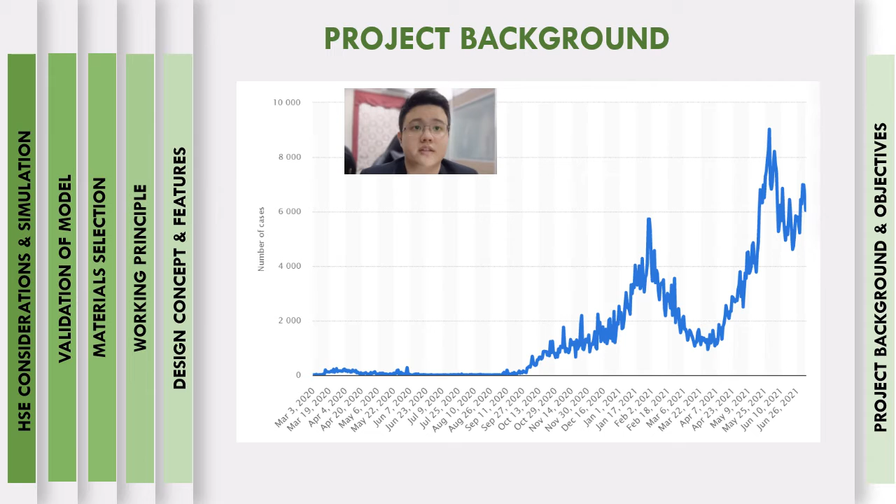The greater number of confirmed cases means that the usage of beds in quarantine centers will be higher, which we can always hear about. The capacity is full in a few of Malaysia's quarantine centers in these couple of weeks. According to a report from Channel News Asia (CNA), the quarantine center in Serdang should only be occupied by 60 patients in category 3, but on 16 May 2021, they already overloaded the beds to around 755 patients.

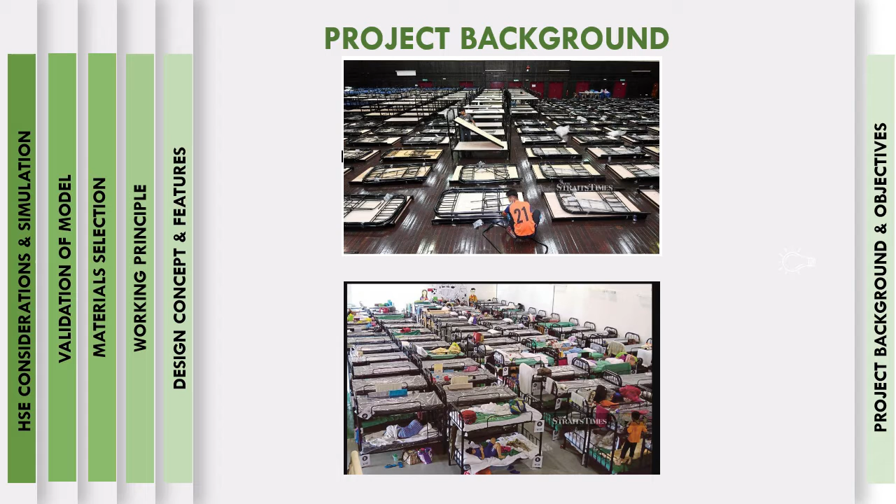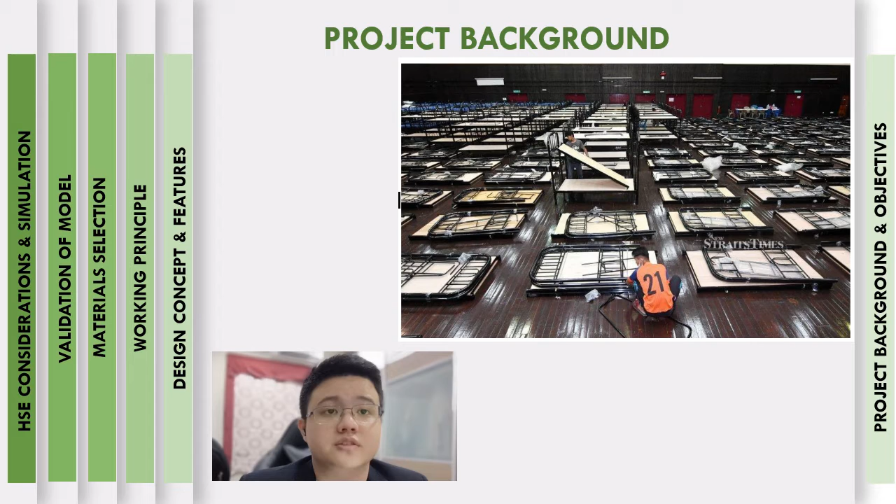This means the government needs to purchase more beds to handle the huge number of COVID-19 patients, so the government has already spent over a million ringgit buying beds for quarantine centers. However, here another problem has arisen: how the government should handle the beds after the pandemic. Are they going to discard them, which will lead to environmental issues, or will the beds be donated to the people in need?

With all these uncertainties, it inspired and motivated us to design a medical bed that can be used in both quarantine centers and hospitals, not only to avoid wastage but also to reduce the annual expenditure the government has spent to purchase healthcare facilities. And the bed we designed is called the Compact Self-Warming Bed, CSW Medical Bed.

The objective of our product is to design a durable, space-saving, portable, and cheaper CSW medical bed. Not only that, we also want to design a self-regulated warming CSW medical bed. Lastly, our objective is also to design a multi-purpose medical bed for use during emergencies.

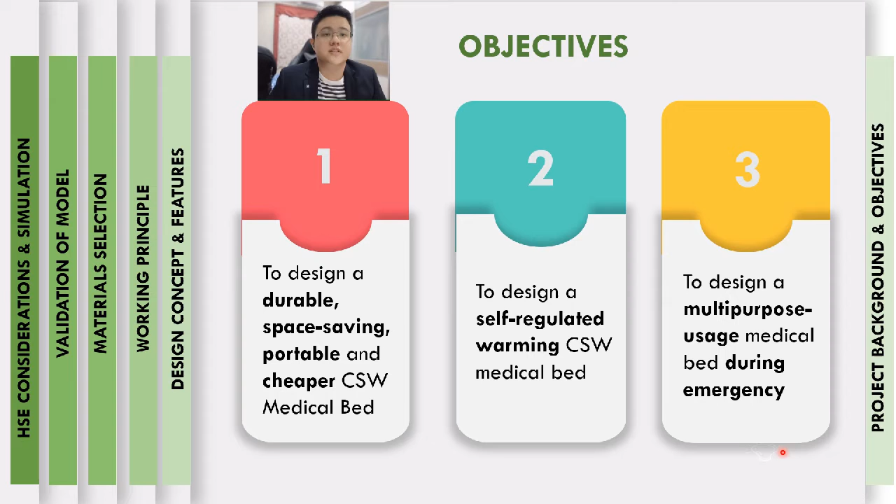Our product also fulfills the Sustainable Development Goals set by the United Nations, which we call SDGs. The first SDG our product achieves is SDG number 3, Good Health and Well-being, which will ensure healthy lives and promote well-being for everyone at all ages. The second SDG achieved is SDG number 11, Sustainable Cities and Communities, which makes cities and human settlements inclusive, safe, resilient, and sustainable.

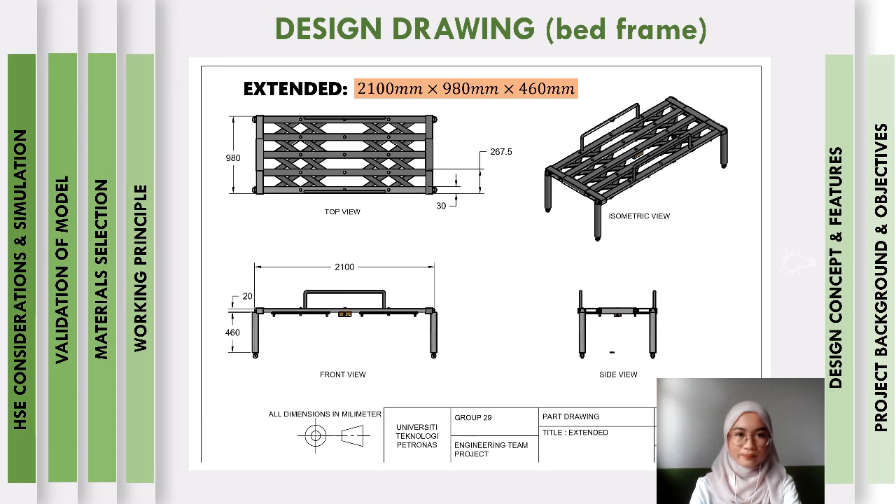The following shows the drawing of the bed frame in extended form. The dimensions for this form will be 2100 by 980 by 460 mm. This is the assembly drawing of our CSW medical bed, which will be explained further in the next video. This is a closer look at our CSW medical bed in extended form.

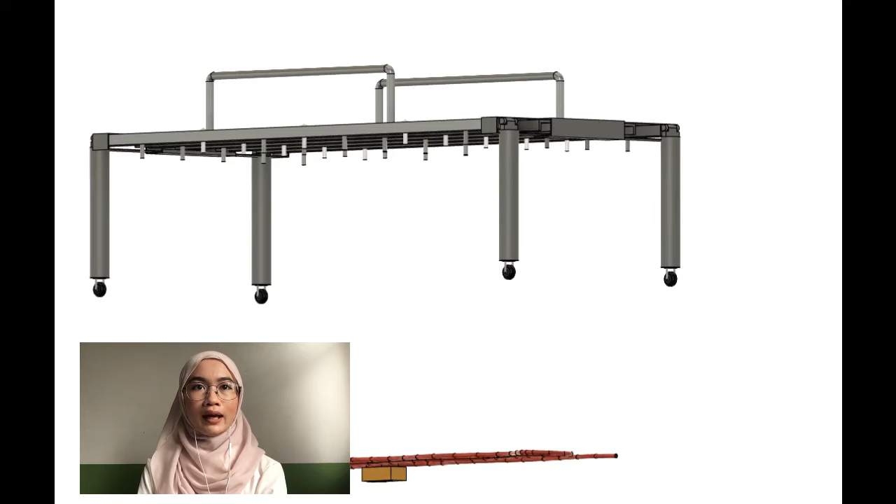At the bottom side of the bed frame, we have installed a self-heating system which is hidden along the hollows of the aluminum channels. Thus, it will not look messy with cables hanging around. Then, we place a mattress on top of the bed frame, which consists of 4 small mattresses combined. This CSW medical bed also has a rail guard to prevent patients from falling out of bed, foldable legs that can be rotated 90 degrees, and wheels for easy mobility.

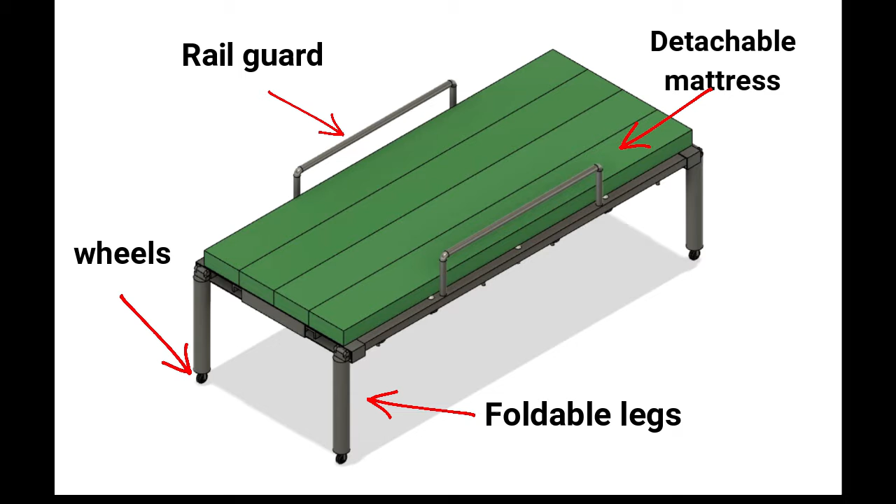After gathering the information, we have modified the existing medical bed into the CSW medical bed to solve the current issues mentioned in the problem background. For example, we have installed a fully automated heating system on our medical bed to solve the problem of high air conditioning in hospitals. When not in use, the CSW medical bed can be fully collapsed to a width of 200 mm.

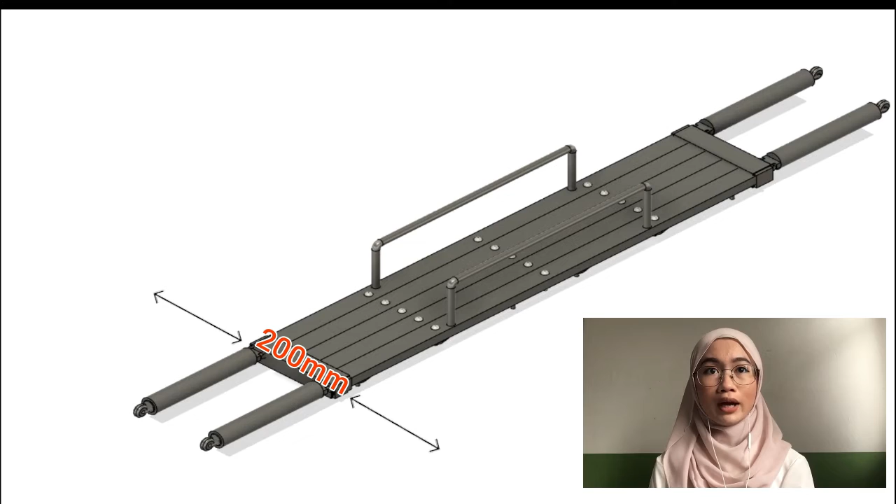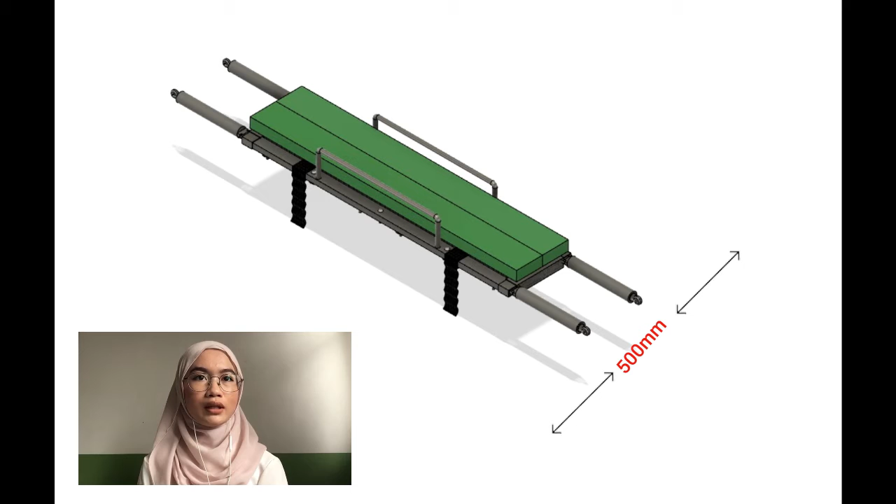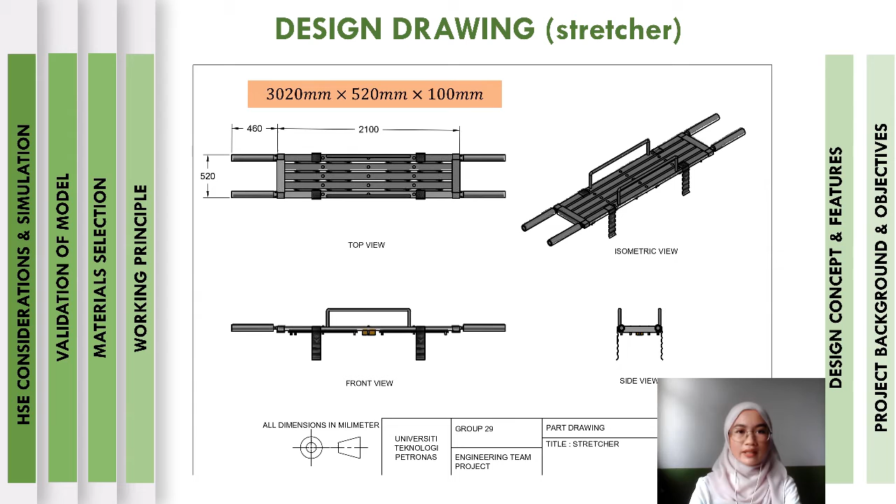Not only that, our CSW medical bed can be transformed into a stretcher. When it is in stretcher form, the bed will be collapsed to a width of 520 mm and 2 of the small mattresses will be put together. With this design, we have achieved Objective 3, which is to design a multi-purpose medical bed for use during emergencies. This is the detailed drawing and dimensions of the frame in stretcher form.

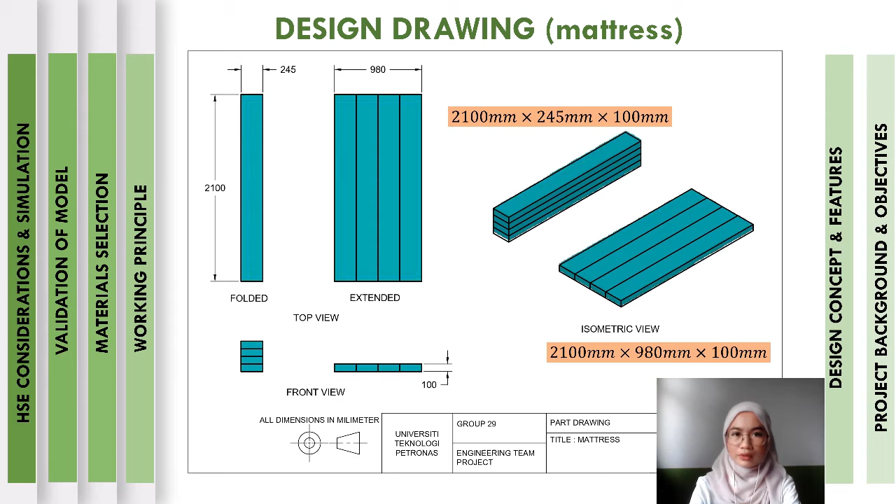Next, we have the drawing and dimensions of the frame in bunch form. Lastly, this is the drawing and dimensions of the mattress, which consists of 4 small mattresses combined together. Next, we will further discuss the working principle of the CSW medical bed in the next section.

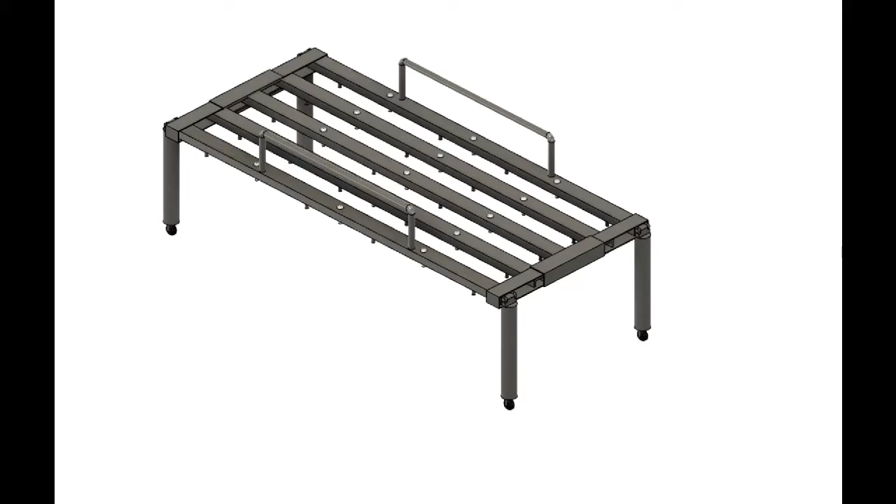The overall design concept and the working principle of our bed frame is greatly inspired by the working mechanism of the collapsible gate that is usually installed at shops. The bed frame is fabricated from vertical pieces of aluminum channel bar to provide the shape. Then, we use the double bar pantograph, a mechanical linkage connected in a manner based on parallelograms, which forms the X design to fill the gap between the vertical channels to reinforce the design. The double bar pantograph and the channels are held in place using fixed and movable rivets.

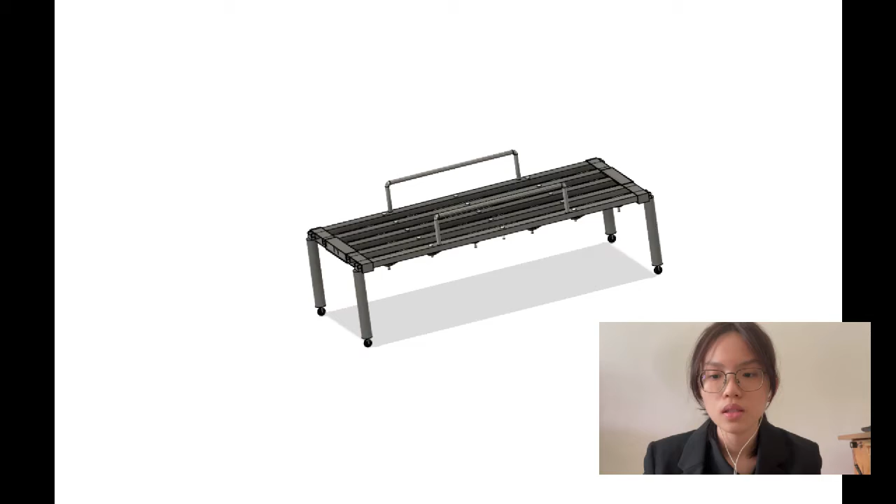With this kind of design, the bed frame can be freely closed or opened. The next video will show you how this can be done. This is a demonstration of the working mechanism between a set of channels. With a slight push, the bed frame is collapsed into a smaller size, and with a pull, it is extended. It can be closed partially to become a stretcher.

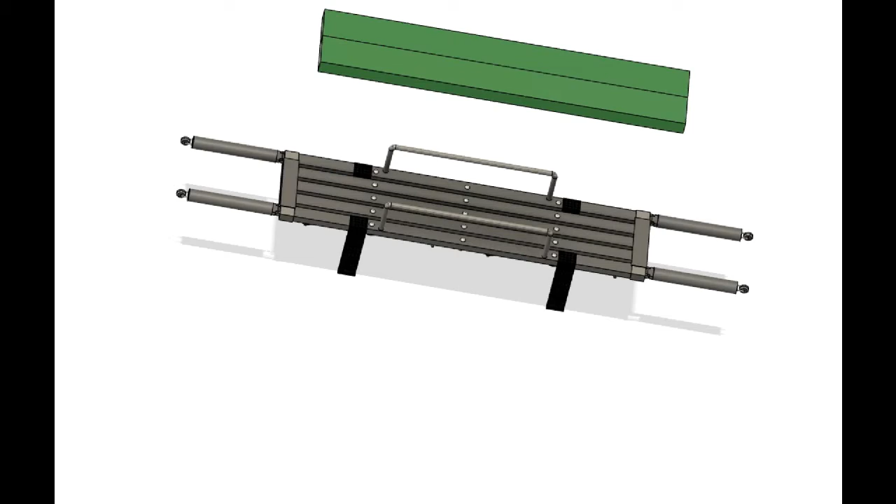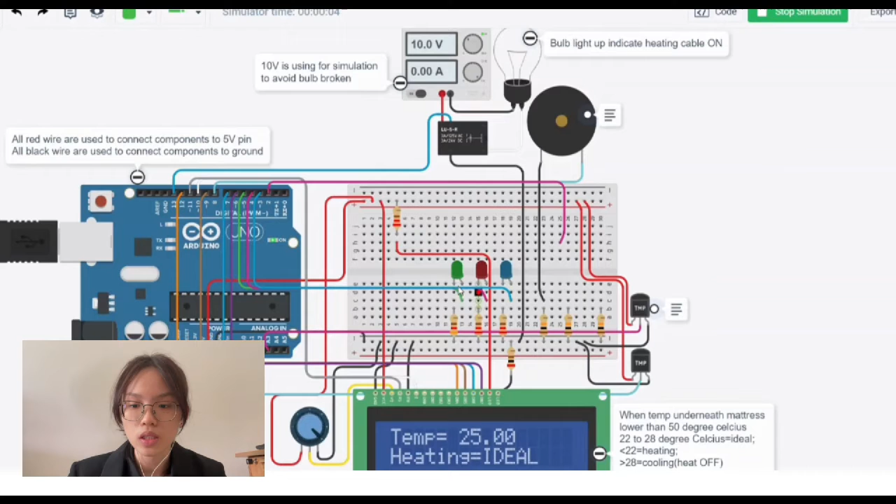This is the circuit simulation of the self-heating system. This is the code of program that runs in C++ language. Now, let's start the simulation. When the temperature is set at 25 degrees Celsius, the heating cable is off. When the temperature drops below 22 degrees Celsius, the relay closes the circuit and the current flows to generate heat.

The heating cable is on. Green LED is lit up as an indicator. When the temperature is adjusted to 38 degrees Celsius, it is beyond the ideal temperature. The relay opens the circuit and the current stops flowing. Red LED lights up. The heating cable is now off.

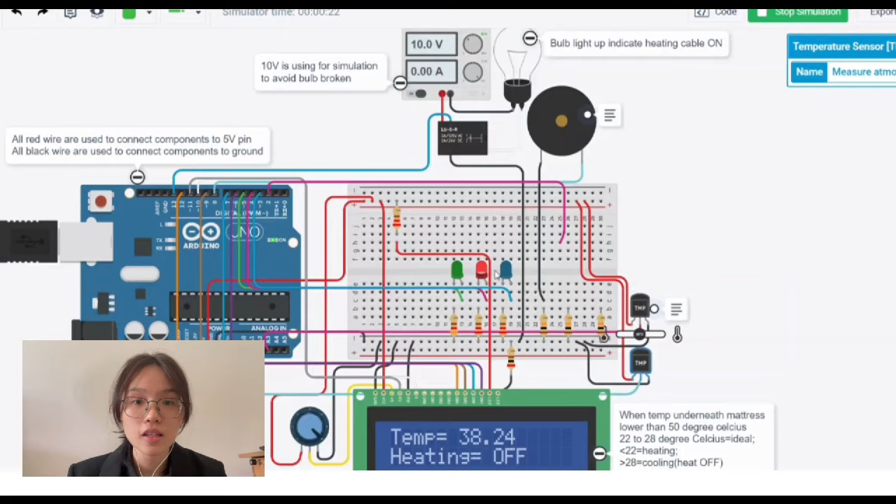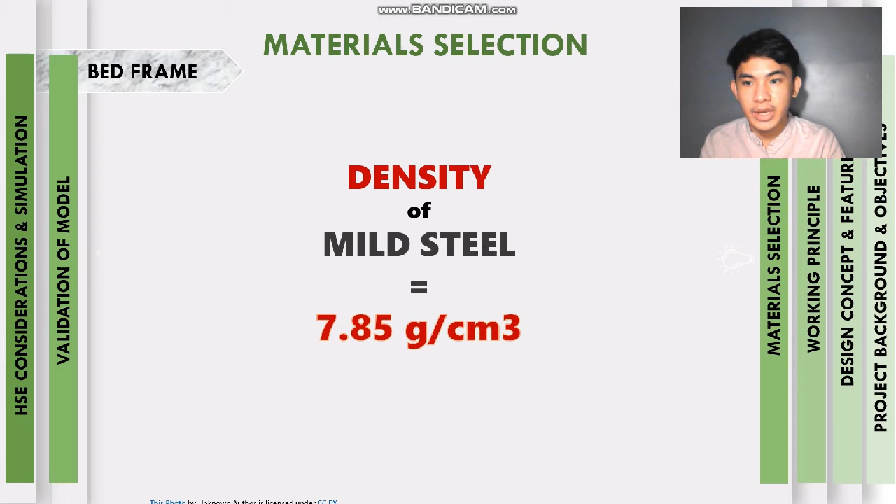For the material selection part, for the bed frame, the material that will be used is aluminum alloy 6061. This material application can be observed in various fields such as automobiles, aircrafts, marines, and defense. Aluminum alloy 6061 has a density of 2.7 gram per cubic centimeter, while mild steel has a density of 7.85 gram per cubic centimeter. This shows that aluminum alloy 6061 is lighter than mild steel. The weight factor is very important because people need to carry it when emergency happen.

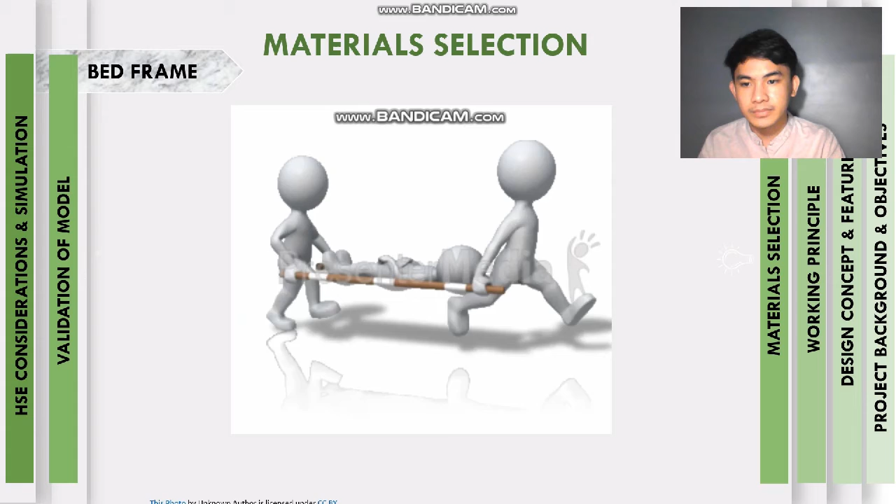Secondly, the heat conductivity of the material is also an aspect to consider, as the bed frame that will be produced is equipped with a heating system at the bed frame. Aluminum alloy 6061 has a thermal conductivity of 180 watt per meter Kelvin, while mild steel has a thermal conductivity of 51.9 watt per meter Kelvin. This proves that mild steel has a much lower conductivity than aluminum alloy 6061. If the material that will be used has lower thermal conductivity, then the efficiency of the heating system will be lower. Therefore, aluminum alloy 6061 is a suitable material for the bed frame, as it will increase the efficiency of the heating system.

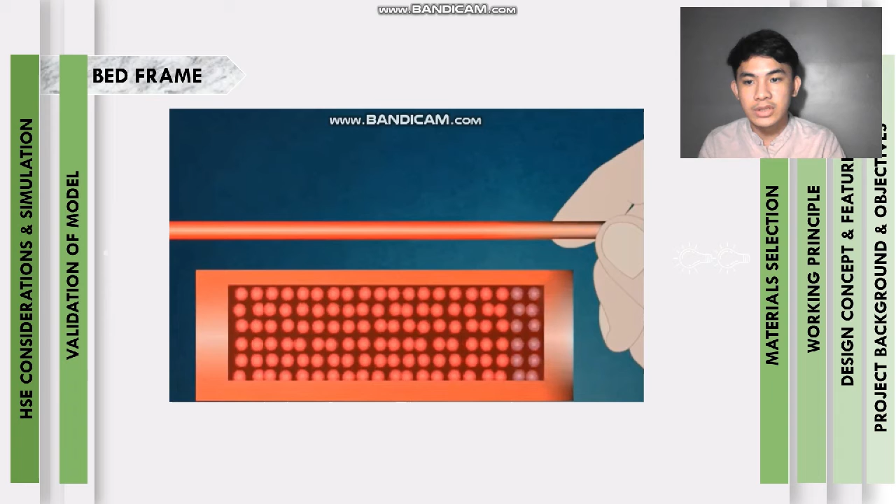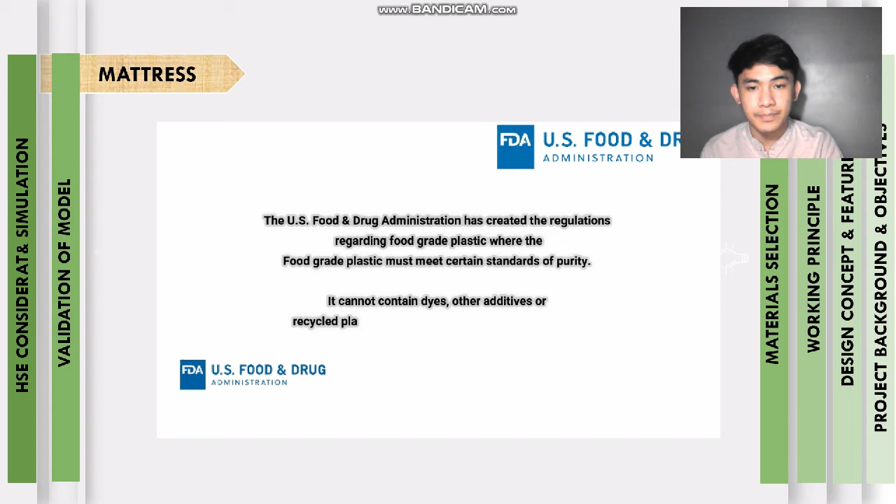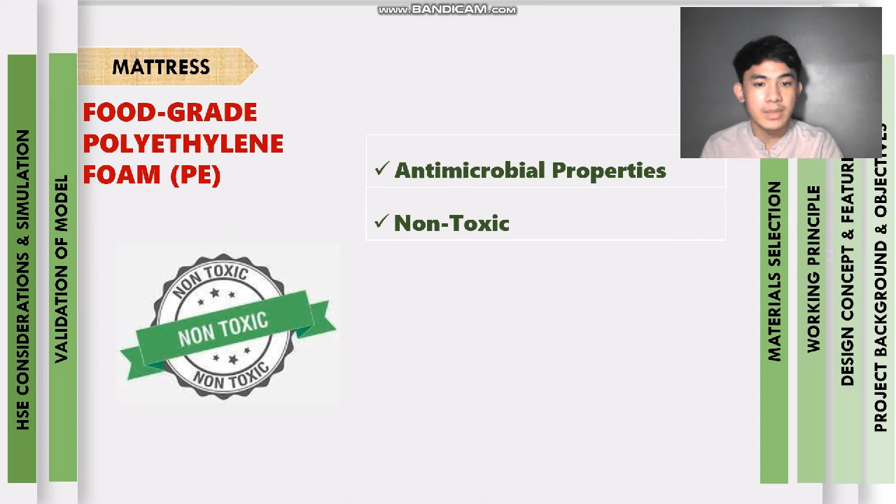Environmental groups across the globe have recommended the use of food-grade PE as a safer plastic option. Crib mattresses made from food-grade PE are now becoming the top choice among parents due to its antimicrobial properties, non-toxicity, flame retardance, low thermal conductivity, and water resistance. Therefore, the food-grade PE would be an excellent material as a bed mattress, especially for our patients, as they have to lay on the hospital beds most of the time.

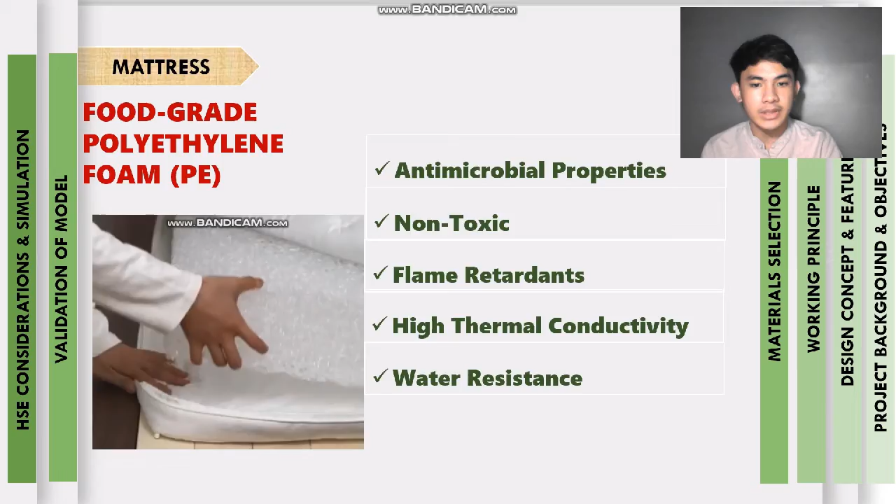On the validation of our compact self-forming medical bed, we conducted a quantitative survey using rating scale method through a Google form to seek for feedbacks and opinions on our product, where in the form we included the design of our product and explained clearly the details of our product and how it works.

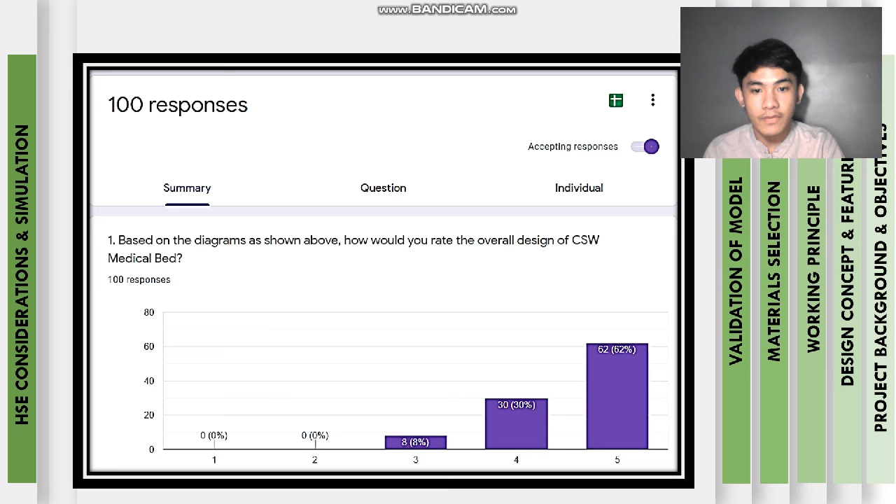A total of 100 people participated in this survey, where 62% rated 5 over 5 of the overall design of our product, 30% rated 4 over 5, whereas the remaining 8% rated 3 over 5. For the functionality and purpose of our product, 65% rated 5 over 5, 32% rated 4 over 5, and 3% rated 3 over 5.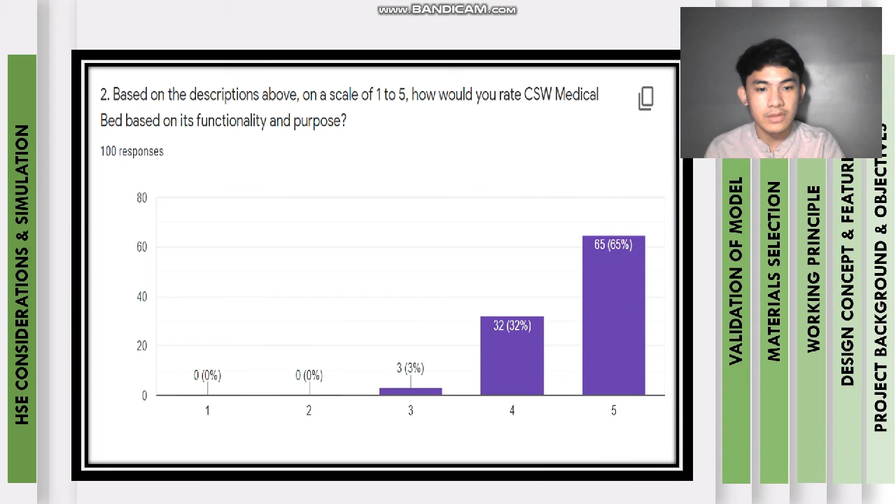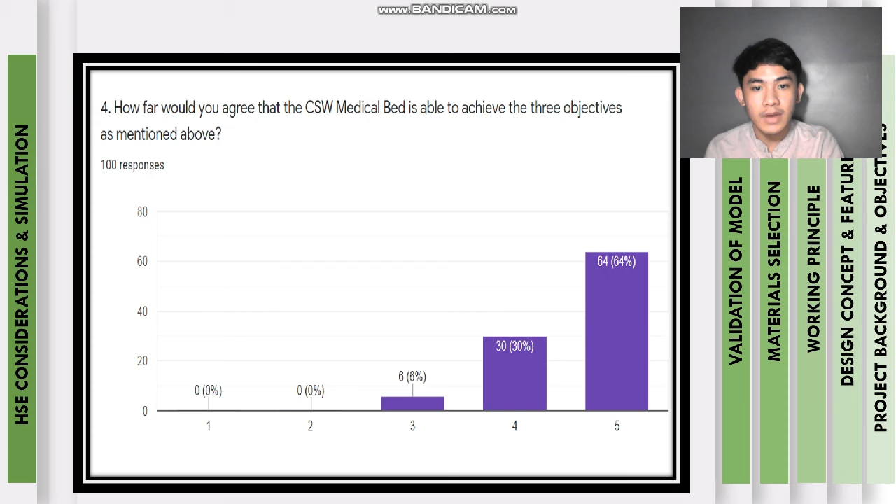While designing our medical bed, there are several health and safety considerations that we have implemented in our design. Since we have installed a fully automatic heating system in our bed, there are potential fire hazards that we have to consider, such as overheating. Therefore, we have made some modification in our heating system to further improve the safety of the system.

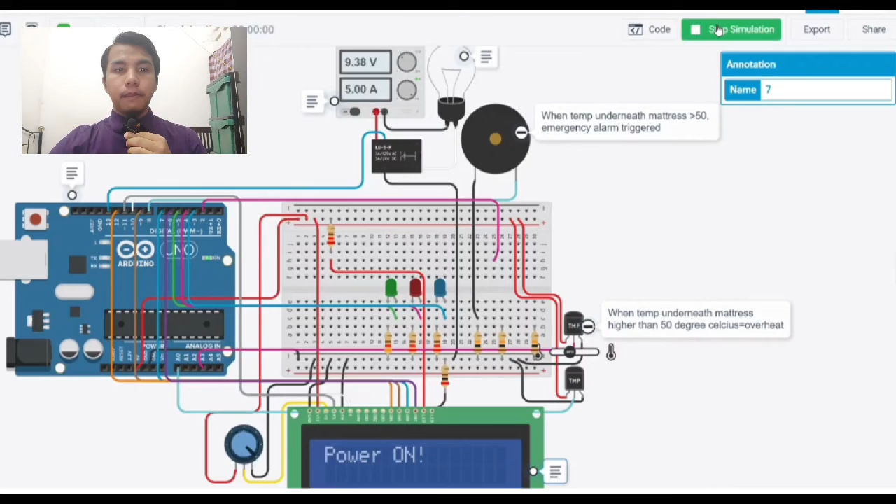By using the same code, another temperature sensor is installed to measure the temperature underneath the mattress. When the temperature under the mattress is higher than 50 degrees Celsius, warning message is shown. The power supply of heating cable will cut off abruptly, while the red and the blue LED light up alternately. The emergency alarm is triggered. Potential fire from the overheated system and mattress can be prevented.

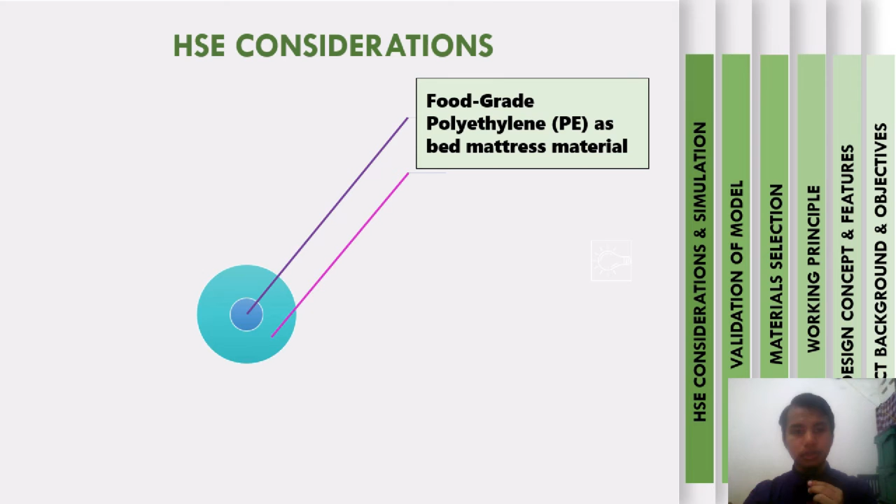Other than that, we also did not forget the HSE considerations on other components of the bed. For example, we have selected food-grade polyethylene as the bed mattress material, as they can withstand high temperatures. The use of high-quality flexible carbon fiber heating cable that can withstand over 5,000 times bend. Installation of belt on the stretcher to fasten the patient when evacuating. And lastly, the installation of the rail guard.

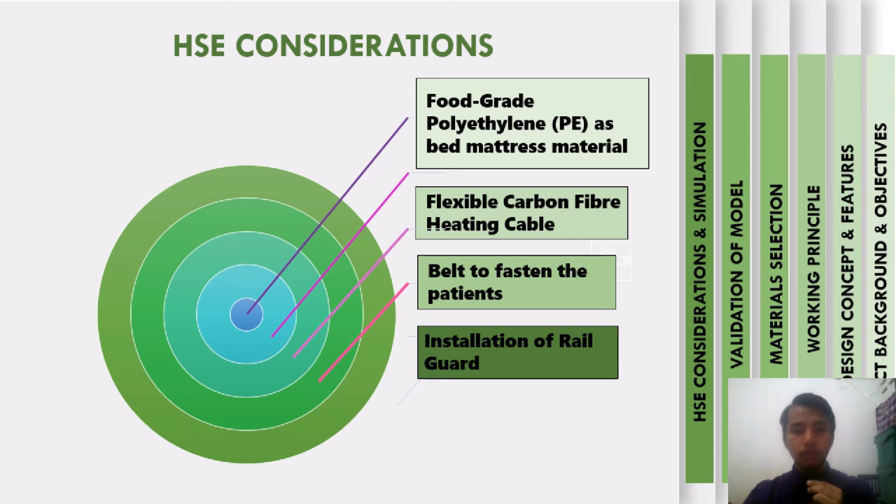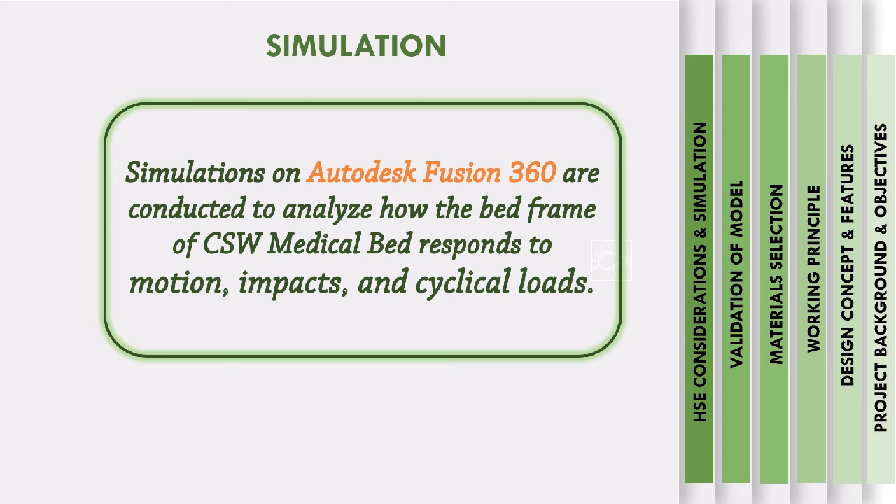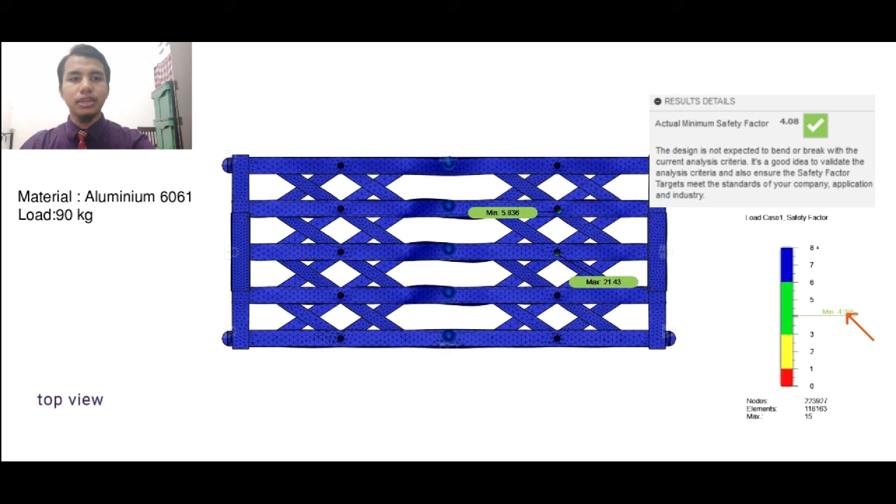Safety factor. This design managed to get safety factor of 4.08 for 90 kg load, which is good. This means that this design can reduce the possibility of failure. Von Mises stress. The maximum stress that this design can withstand for 90 kg load is about 50 megapascal. The added structure here helps to increase the strength of the design.

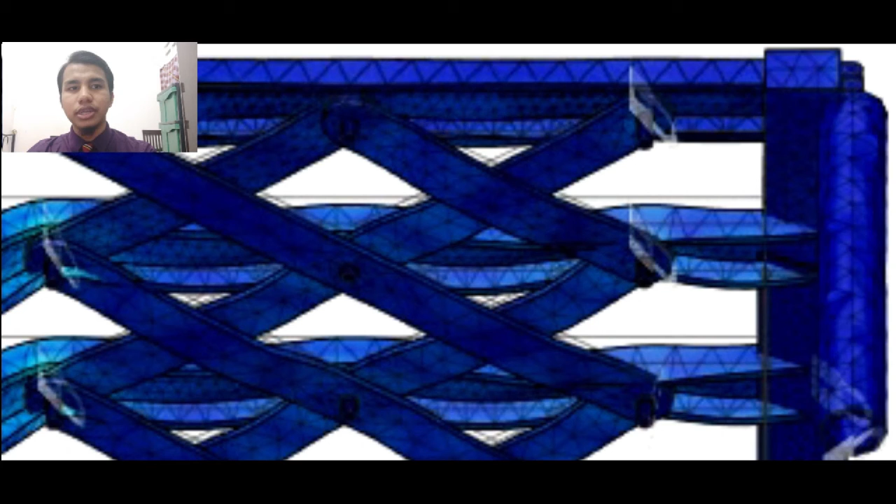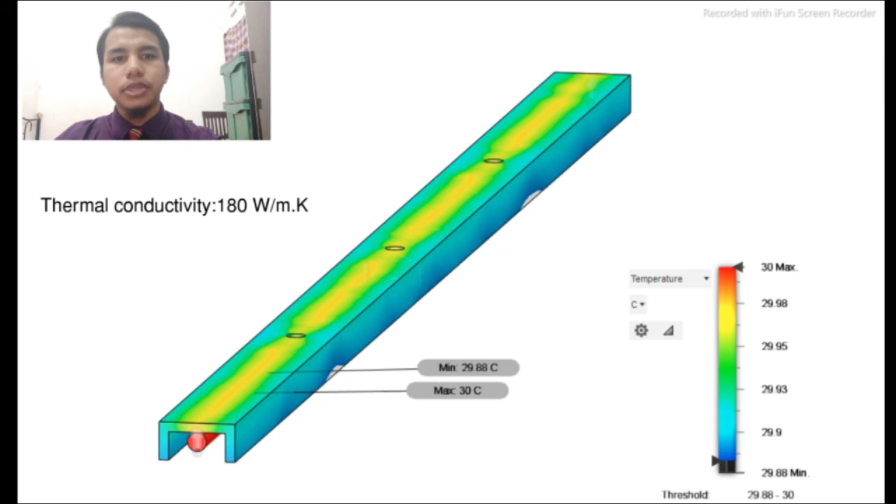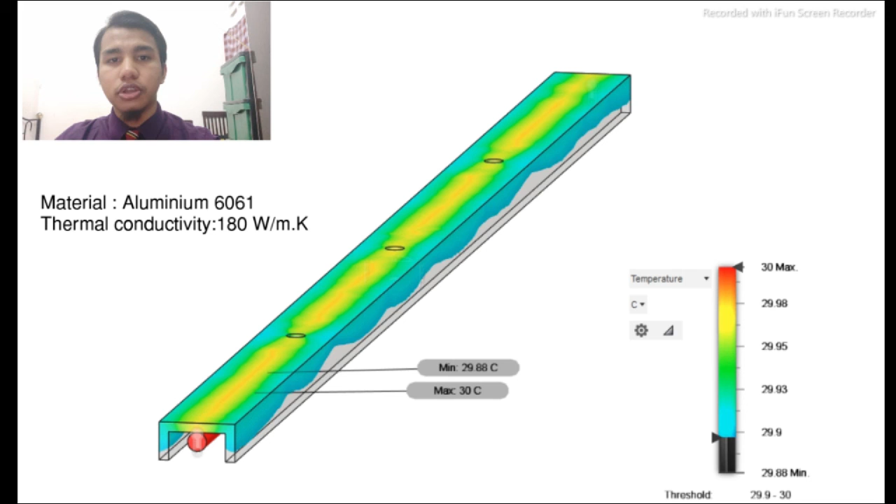Displacement. For 90 kg load, the maximum displacement of this design will be about 0.03 mm. The maximum displacement will occur at the center as there is no support underneath the frame. Thermal distribution. When the heating system is operating at 30 degrees Celsius, the frame will experience temperature of 29.88 degrees Celsius. This shows that the material used as frame has a very good thermal conductivity. Because of this, the efficiency of heating system will increase.